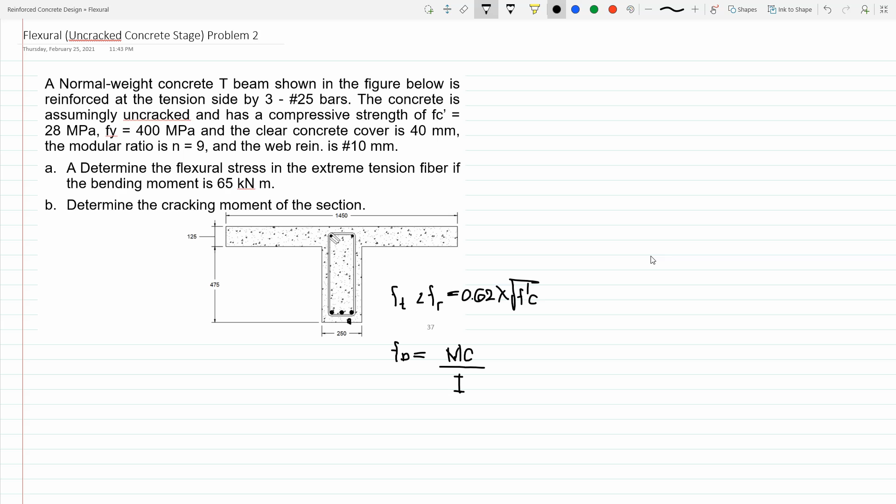So, to start the solution, itakil muna natin yung first assumption kung saan we will neglect the existence of rebar. So, para sa solution number 1, letter A, kailangan muna nating malaman kung nasaan yung tinatawag na center of gravity. Dahil nga yung shape natin is irregular na, yung ating center of gravity ay hindi pa totally known at this very point. So, kunin muna natin kung nasaan yung ating center of gravity, noted as CG, at measured na lang natin siya from the top part of the beam, so Y bar.

So to do that, kailangan muna natin kunin yung area gross. Dahil nga neglected yung steel dito, gross yung magagamit natin. In that manner, we have 1,450 multiplied by 125 plus 250 multiplied by 475. So once na i-punch mo yan sa calculator, lalabas na ang sagot ay 300,000.

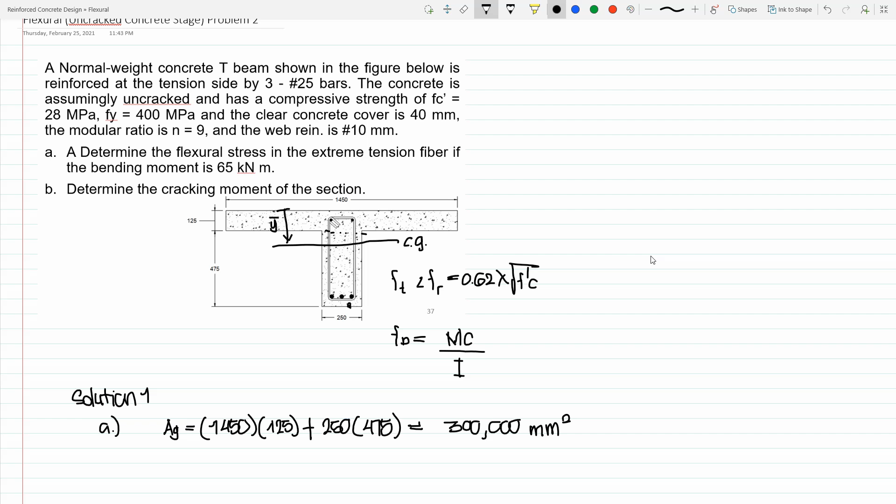Of course, millimeter square. Ngayon, pwede na natin siyang gamitan ng Varignon's theorem. So, hahatiin ko sa dalawang area yung ating shape. So, meron tayong rectangular sa baba, tsaka rectangular sa taas. Okay? So, we have total area, 300,000, multiplied by Y bar, equals dun sa components niya.

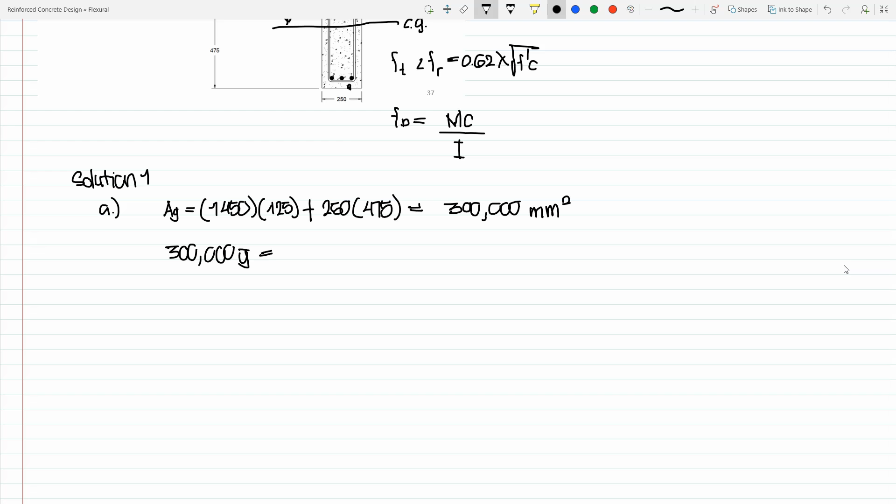So again, yung area nung nasa taas, we have 1,450 multiplied by 125, tapos lever arm nun with respect sa pinakataas, kalahati. So 125 all over 2. So ito yung ibig kong sabihin, yung centroid nito, kalahati ng 125 mula sa taas.

Plus, yung second shape, we have 475 multiplied by 250. Tapos, yung ating lever arm is 125 plus 475 divided by 2. And once na i-punch mo yan sa calculator, lalabas na Y bar is equivalent to 181.25. Of course, millimeter.

So dahil meron na ngayon tayong location ng center of gravity, we can now determine the moment of inertia nung buong section, nung combination ng dalawang rectangle part nito. To simplify the solution, hahatiin natin sa dalawang rectangle. So we have this first rectangle, bubuuin natin yan. So mula dito hanggang sa point na ito. So that is the first rectangle.

While the second one, ito naman. So dahil this part ng rectangle tsaka yung kabila, parehas lang yan. So, i-multiply na lang natin yung effect nila by 2. So, ganun yung magiging paghahati natin para mapadali yung pagkuha ng moment of inertia.

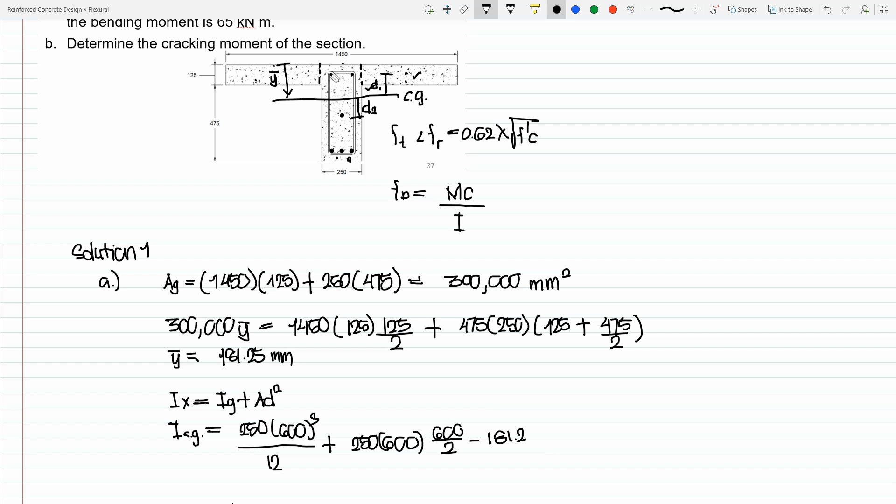So, we have 250 multiplied by 600 cubed all over 12 plus yung Ad squared nun. So, we have 250 multiplied by 600, tapos yung kanyang distance from the centroid ng section. And that is 600 all over 2 minus y bar, which is 181.25. And then, wag kalilimutan na square. So, yan yung unang term.

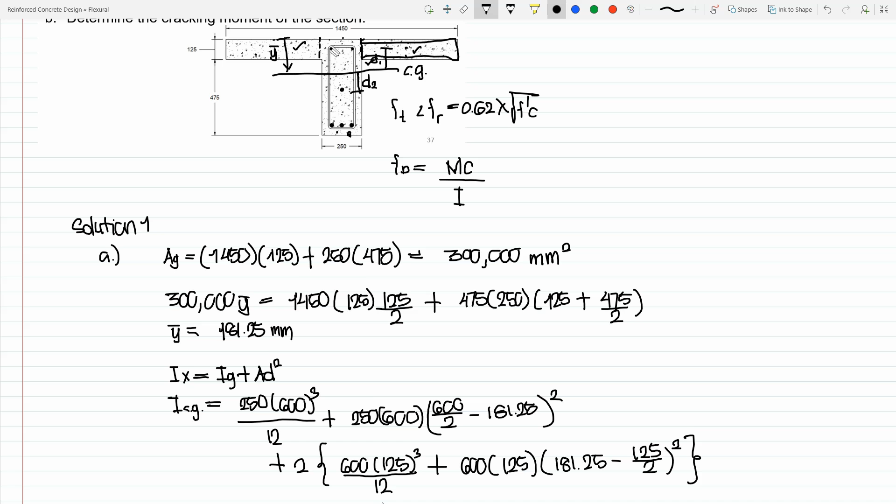And once na i-punch mo yan sa calculator, lalabas na ang sagot ay 8,925.781 times 10 raised to 6, of course, millimeter to the fourth. So, yan yung as is na ginamit ko, si IG tsaka si Ad squared. So, that is one practice sa pagkuha ng moment of inertia. As is, kung ano yung transfer equation, ganun mo siya gagamitin.

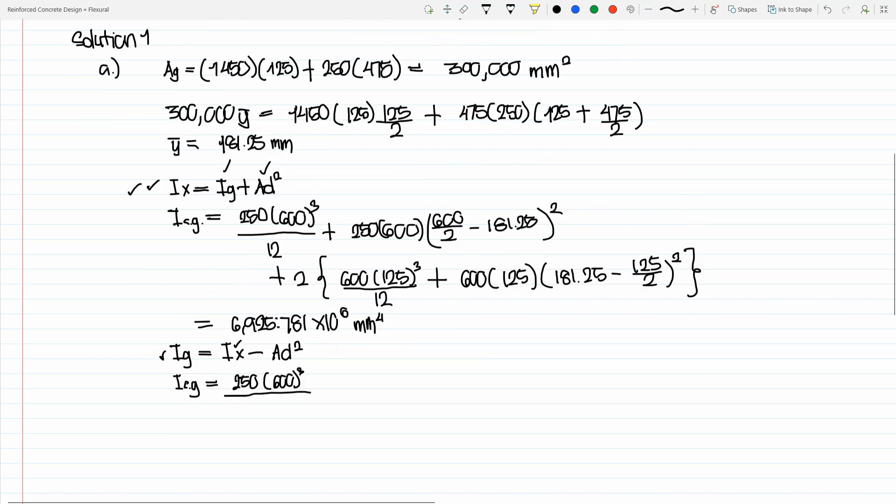So, we have, dahil yung height doon ay 600, so we have 250, tapos 600 cubed. But this time, dahil hindi centroidal yung kailangan natin, kung babalikan ko yung mismong shape, ito yung pinag-uusapan natin. Ang moment of inertia niya sa gitna is yung tinatawag na IG, which is BH cubed over 12. Pero yung moment of inertia ng isang rectangle with respect naman dun sa kanyang base is equivalent to BH cubed all over 3.

Yang BH cubed all over 3 na yan, pwede mo yan makuha using the transfer equation ng moment of inertia. So pwedeng sabihin na equal yan sa BH cubed over 12 plus Ad squared. So, B multiplied by H, tapos yung distance D. So, ito yung magiging D natin. So, we have H over 2 tapos naka-squared. And once na i-simplify mo yan, babalik ka doon sa equation.

So, at the base, again, the moment of inertia is BH cubed over 3. Plus, yung BH cubed over 3 naman nung susunod na shape. So, yung moment of inertia niya, again, with respect sa ating reference axis. So, BH cubed then over 3. So, we have 600 multiplied by 125 cubed all over 3. At dahil dalawa yung ating kinoconsider kabilaan, so imu-multiply ko ngayon ito ng 2.

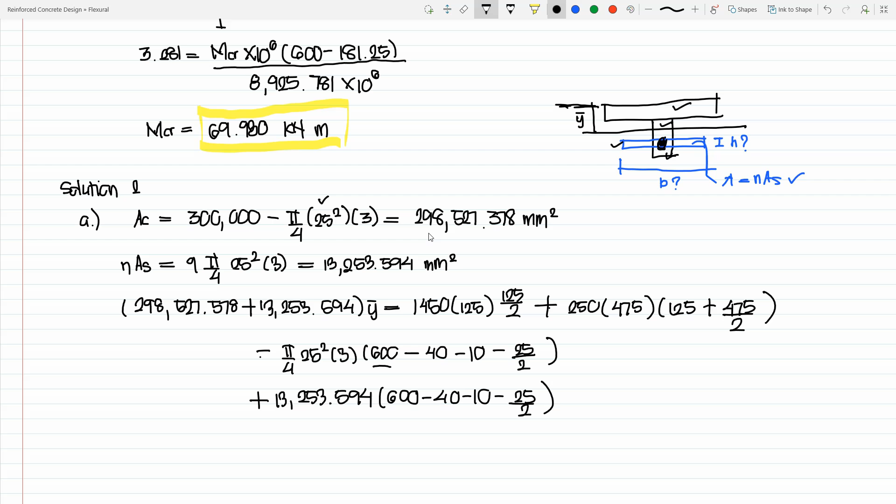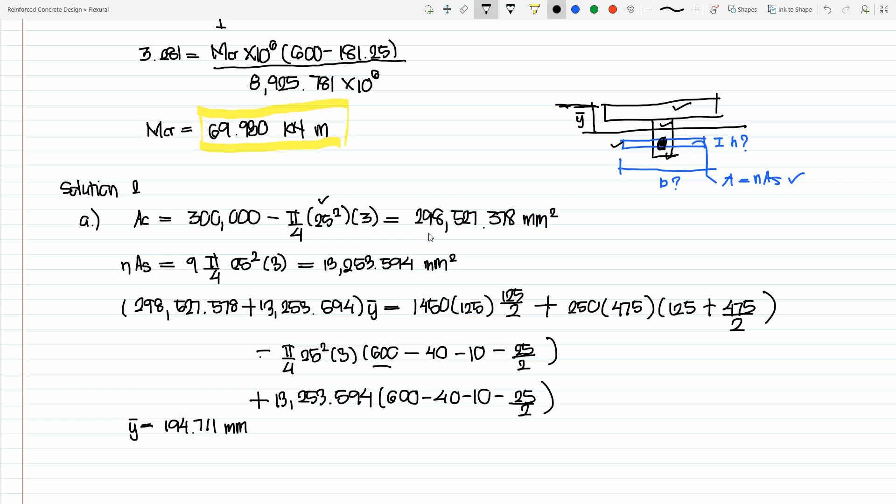So, dahil nakakuha na tayo ng centroid, alam na natin kung nasaan yung ating center of gravity considering the effect of steel, we will now determine our moment of inertia. Eh sir, meron na tayong moment of inertia before. Again, that moment of inertia is neglecting the effect of steel. This time, yung bago nating moment of inertia na kukunin, include natin yung ibinibigay na effect ng steel.